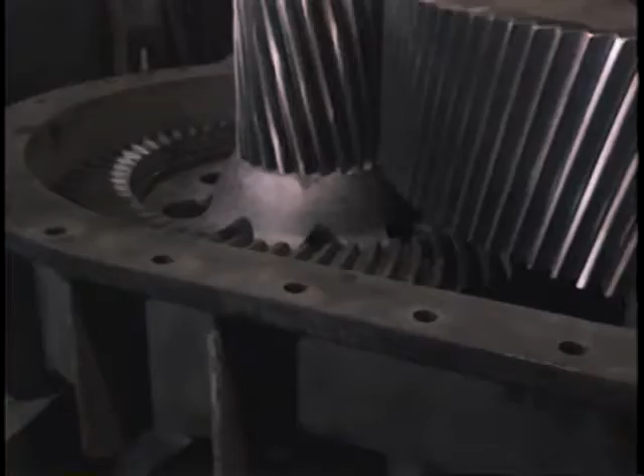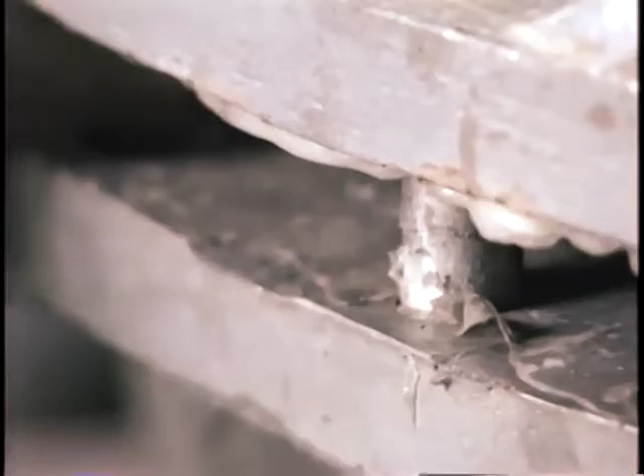When the speed of a motor is different from that required for an application, speed reducers, frequently called gearboxes or gear reducers, are often used to lower the speed. Usually the reducer or gearbox consists of a set of gears enclosed in a sturdy metal housing. The housing keeps the gear set aligned so the gear teeth mesh correctly. Correct alignment increases the life of the gearing and transmits power efficiently.

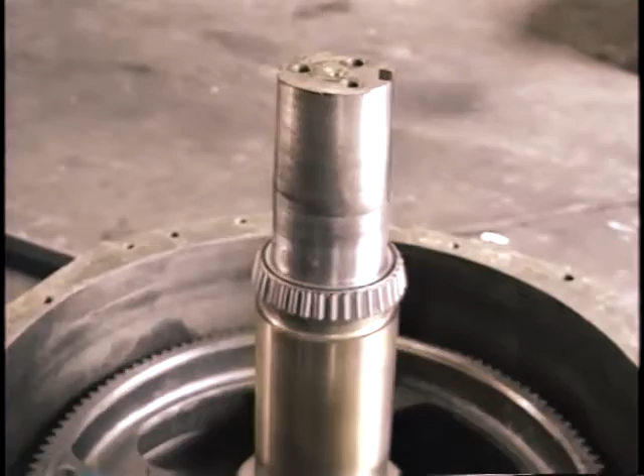The power typically comes from a motor or other driver which is coupled to the input shaft. The speed and power of the motor are transmitted through the gearing to the output shaft, either by complete reduction, in which the reducer is connected directly to the driven machine, like this, or by partial reduction, like this belt drive that further adjusts the speed.

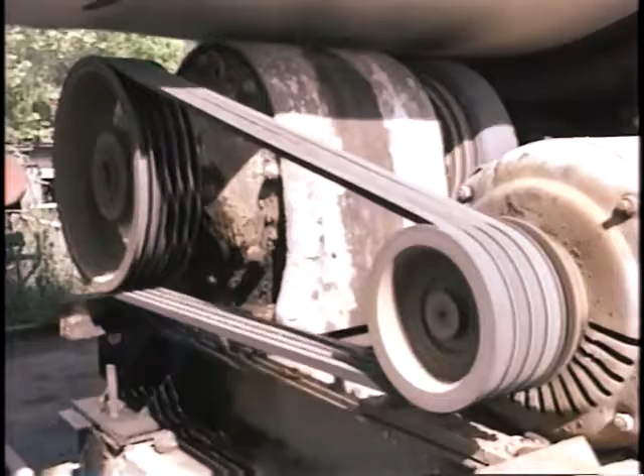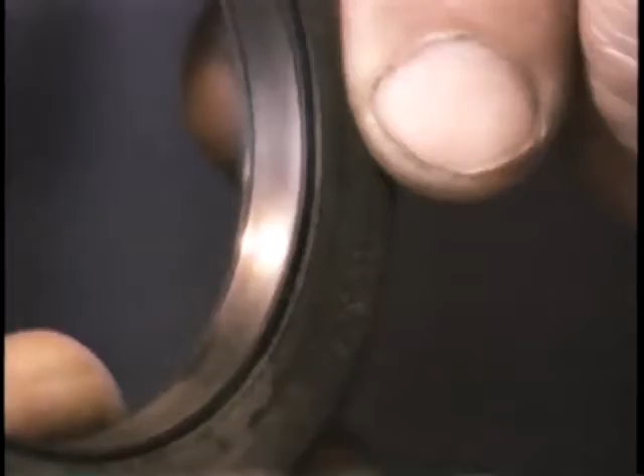Now, most reducers are basically the same, so once you know how to maintain and troubleshoot one, you'll be able to do a pretty good job with all the others you might have to work on. In this program, we'll show you the basic parts of all reducers. We'll show you some of the common things that go wrong with them. We'll show you how to spot problems early, before they become serious. We'll show you how to maximize the efficiency of the reducer and extend its life. And we'll show you what to look for during an overhaul.

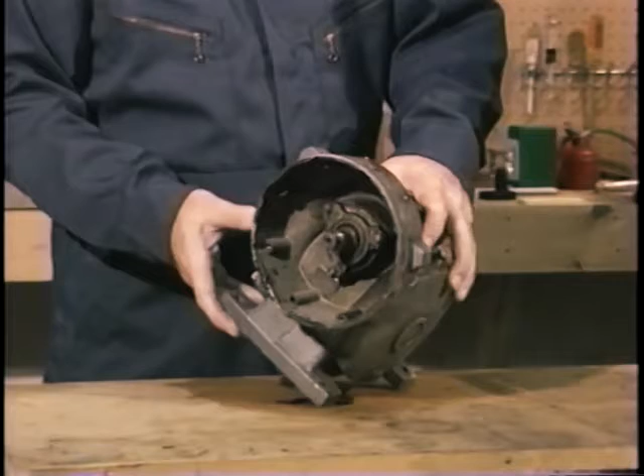Let's start with the basic parts of a common gear reducer. Here's one of the most common types, a worm gear reducer. We already mentioned the input and output shafts. These can really stick out just about anywhere, depending on the design of the reducer, what kind of gears are in it, and the application.

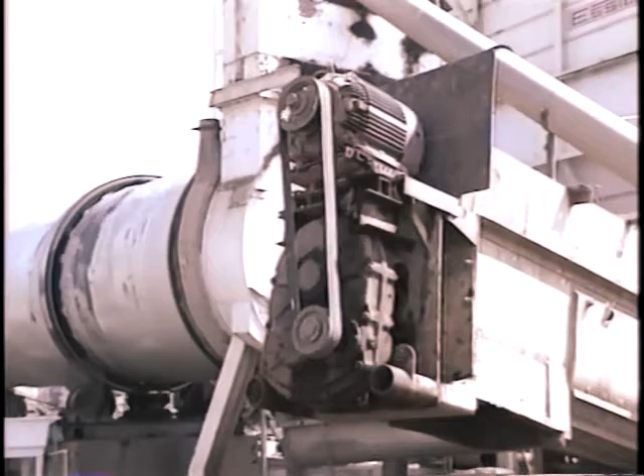In terms of the input and output shaft, there are really just three kinds of reducers. The concentric or inline reducer, in which the input and output shafts are directly in line with each other, like this. The parallel or offset shaft reducer, in which the shafts are mounted at opposite ends of the reducer. And various kinds of angle shaft reducers, like the worm reducer.

However, reducers are also classified by their gear trains: single reduction, double reduction, triple reduction, and so on. In a single reduction unit, a gear on the input shaft drives a gear on the output shaft. In other reducers, the input shaft drives an intermediate gear, which may drive another intermediate gear, or the output shaft. Anything beyond a triple reduction is relatively uncommon.

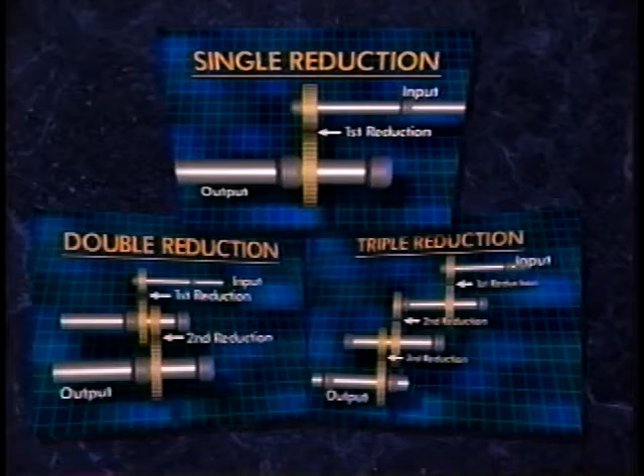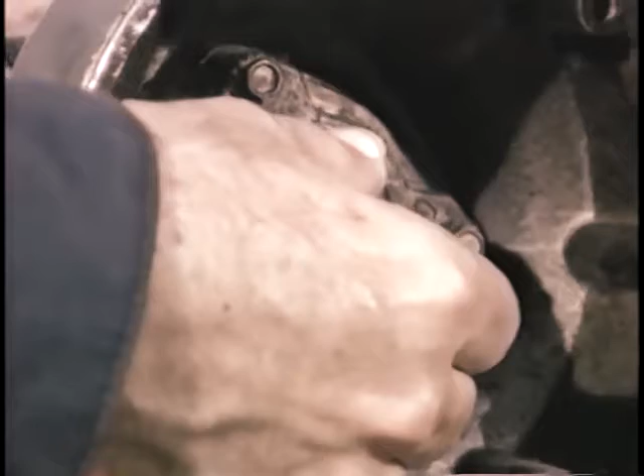Let's get back to the worm reducer. Here, the shaft of the worm is coupled to the shaft of the driver. Typically, this is done with splines on the shaft like this, or with a key and keyway like this, and sometimes with a coupling. When the worm turns, its teeth rotate the gear wheel fastened to the output shaft. Since this wheel is a good deal larger, its shaft rotates more slowly, usually a lot more slowly.

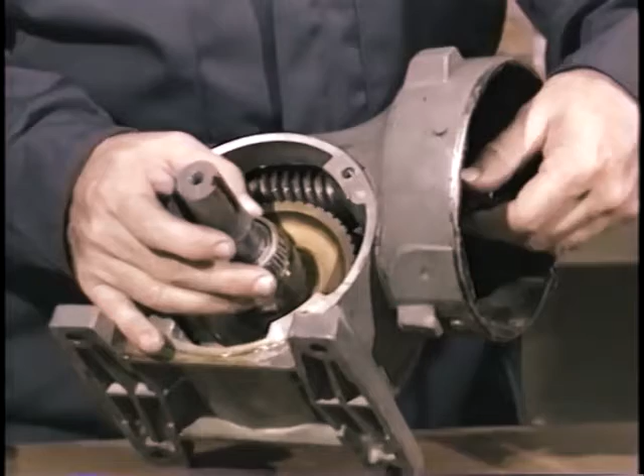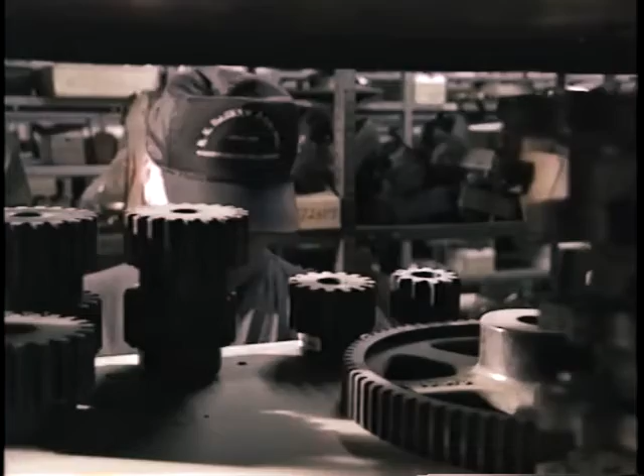Worm reducers are often used when there is a need to greatly reduce shaft speed. Typical input to output speed ratios on a worm reducer are at least 20 to 1 and may go as high as 3,600 to 1 or more. This means that 3,600 turns of the input shaft will turn the output shaft around just once. Of course, different reducers will have different ratios. Many reducers are custom assembled by a manufacturer or distributor from in-stock parts to match the requirements of a particular application. Swapping out the gearing changes both speed and torque at the output shaft.

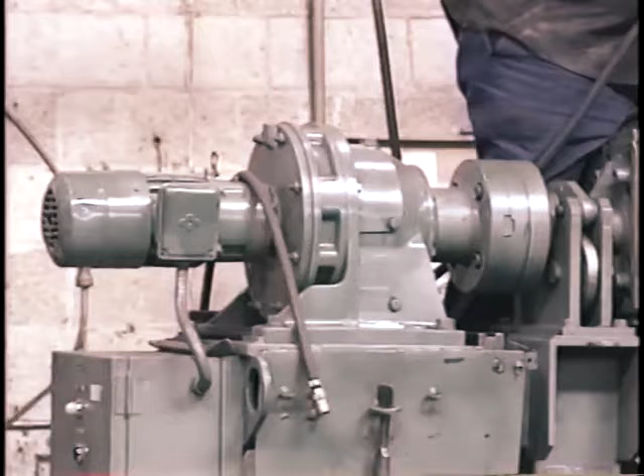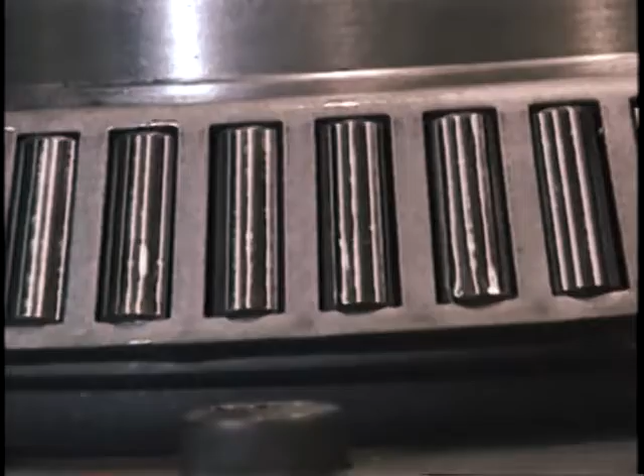Handling the high speeds and torques requires firm shaft support as well as precision shaft alignment. Support is provided by the reducer housing, usually made of cast iron or fabricated steel, and by bearings set into the housing. Input shafts of smaller reducers are sometimes supported by ball bearings, often a bearing at each end of the shaft, but sometimes just a single bearing. Output shafts are usually supported by roller bearings. Almost always there are two bearings, one at either end of the shaft. This provides greater support for the load.

Realignment of shafts within a reducer is normally done only if the reducer has been mechanically damaged, if it has been run hot enough to burn up the lubricant and seals, or if it is being overhauled and the shafts, bearings, and gears are being removed for repair or replacement.

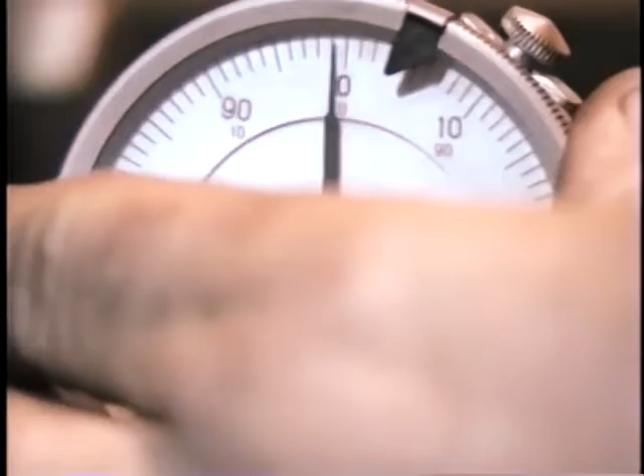However, the alignment of the input shaft with the driver and the alignment of the output shaft with the driven machine is critical. Misalignment will put excess load on the bearings, wearing them out much more quickly. Misalignment will increase the damage caused by shock loading, and misalignment will wear out seals rapidly, allowing lubricant to leak out and contaminants to leak in. But if a reducer is properly sized for its application, if it is correctly aligned, and if shock loading is kept to a minimum, then failure will almost always be the result of lubricant failure.

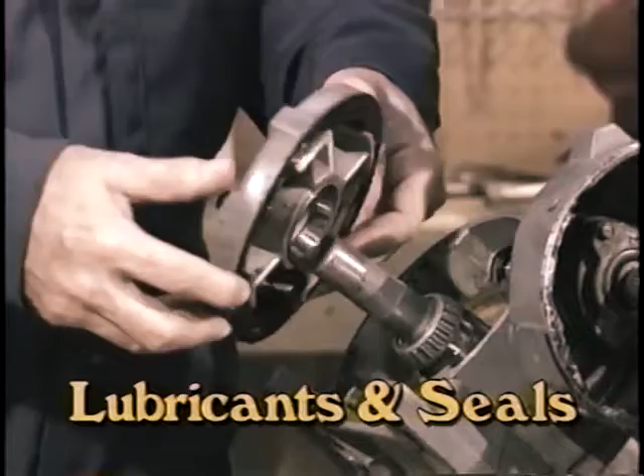The lubricant got too hot, it was contaminated, or a seal leaked and lubricant levels were too low for too long. We'll get to sizing a reducer for its load in a few minutes, but first, let's have a look at lubricants and seals. Wherever a shaft penetrates the casing, a seal will be required.

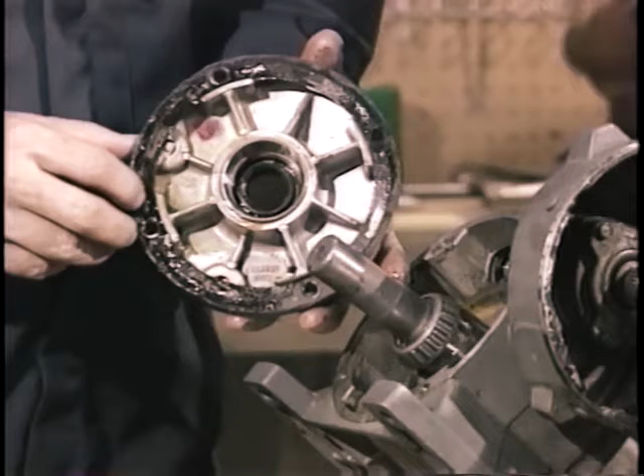The seal has two purposes: to keep the lubricant in and to keep contaminants out. All seals will eventually fail, but seals that are correctly installed and properly maintained will maximize machine efficiency and minimize downtime. The basic type of seal used in most reducers is a dual-lip, full-ring contact seal in a seal case.

The inside lip of a seal usually has a small spring, a garter spring, which keeps the lip in contact with the shaft. The outer lip's resiliency keeps it in contact with the shaft. Some manufacturers also include other assemblies, like this outer seal, which can be filled with grease to block contaminants from getting to the inner seal. The seal is often held in place by a retainer.

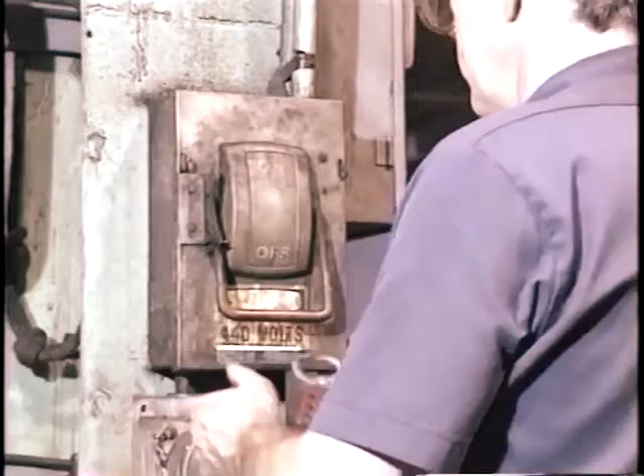Now, sometimes just the seals on a reducer are replaced, and the reducer doesn't have to be opened up. Let's see how that's done. Now, the first step when doing any maintenance on a reducer is to lock it out. Follow the established lockout procedures for the facility in which you work and for the particular piece of equipment you'll work on.

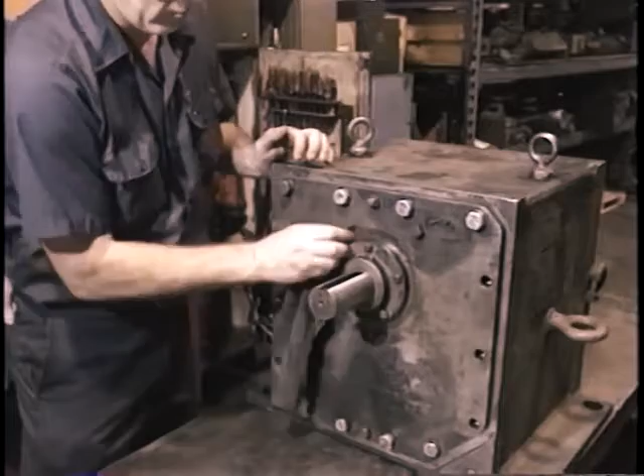After the machine is properly locked out, start by cleaning off the shaft and the outside of the reducer around the seal. This will help keep contaminants out of the reducer when the old seal is removed. Next, remove the seal cage assembly. Most seals have gaskets, and these will have to be replaced with new ones. Check the manufacturer's specifications to make sure you know which ones to use.

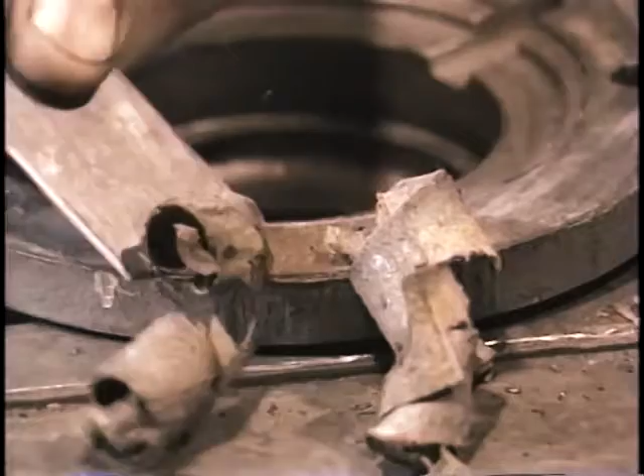They will have to be the same size and shape, and they will have to be of a specific thickness as well. Work carefully. If the seal cage is damaged in the process, it will have to be replaced. Do not attempt to reuse a seal cage that is bent, distorted, or scored, because the seal will probably leak. Clean the seal cage thoroughly and remove any gasketing material.

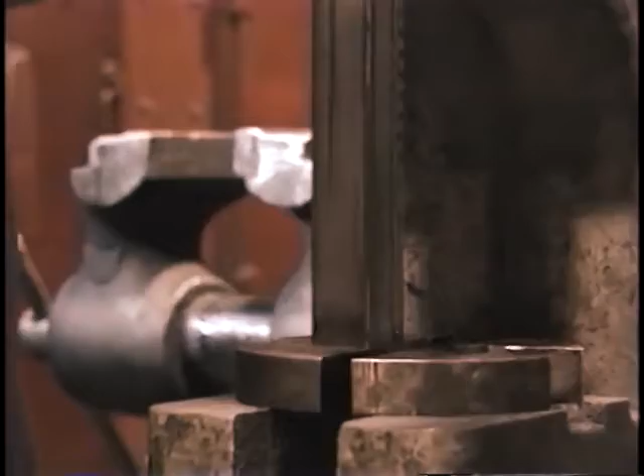Some manufacturers specify a sealing compound for coating the seal prior to installation. Follow the manufacturer's instructions, then place the seal squarely in the seal cage with the garter spring on the side of the cage that will be toward the bearing.

Press or tap the seal into place by using a cylindrical tool that applies pressure evenly around the circumference of the seal case. Pressing or tapping directly on any small portion of the seal case will distort it, damaging the seal and almost certainly causing a leak once it is reinstalled.

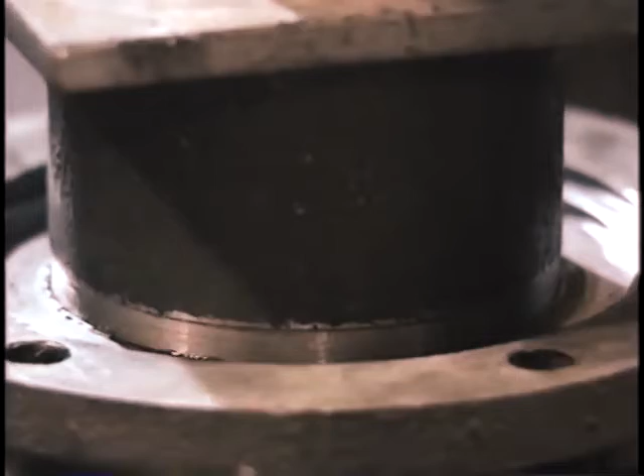Before installing the seal cage and seal, be sure to clean off the shaft and clean off the face of the reducer. When cleaning the shaft, do not scrape or use abrasive materials on the part of the shaft that has been polished by the seal. This polished section will be bounded on either side by seal paths or wear tracks.

They should be very narrow, generally no more than 2/100ths of an inch, and barely felt when passing a fingernail over them. Paths that are significantly wider or deeper indicate shaft misalignment, cocked seals, or a shaft that does not run true. Failure to correct any of these conditions and failure to repair the shaft will probably result in leaks when the new seal is installed.

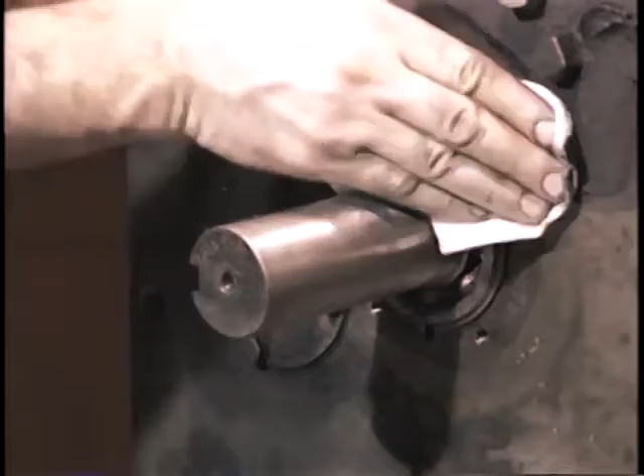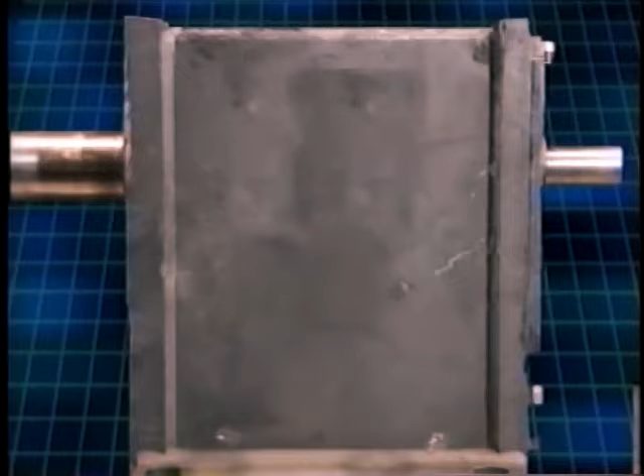When cleaning off the face of the reducer, be sure to scrape off any old gasketing and clean the surface thoroughly. The condition of the surface and the thickness of any gaskets or any shims may be critical to the proper operation of the reducer. In some cases, especially when replacing seals at the output shaft, you may have to measure and set the axial float on the shaft as well as set the preload on the bearings.

Axial float is a measure of how much the shaft will move back and forth. Typically, this is just a few thousandths of an inch. Depending on the manufacturer, it may have to be set to within a thousandth of an inch or less. A dial indicator is normally required to measure axial float accurately. Be sure to follow the procedures and specifications set forth by the manufacturer.

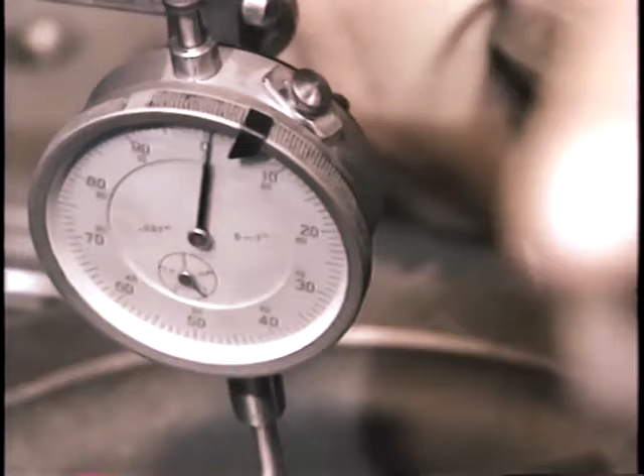Preload refers to the load placed on the bearings before any running load is added. Usually, preload is set indirectly by measuring the axial float, then varying the thickness of the gaskets and shims. Again, preloads are often set to within a thousandth of an inch or less, so a dial indicator and a copy of the manufacturer's service manual are normally required.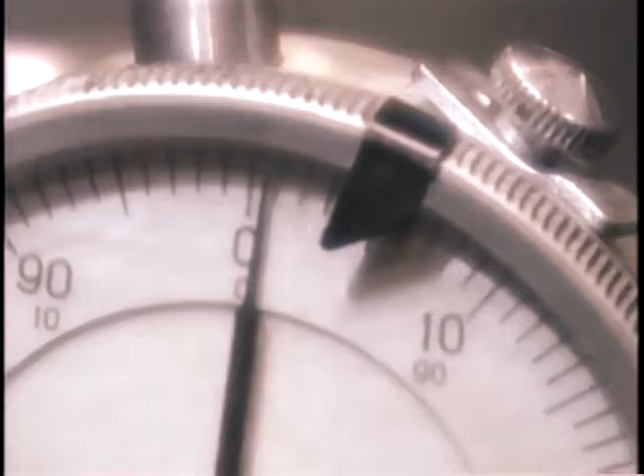When installing gaskets, always use new ones. In many cases, the gaskets also serve as shims, shim gaskets as they are called.

They are designed to compress a specific amount when installed. Because used gaskets or shim gaskets have already been compressed, they may not provide the correct axial float, the correct preloading, or the correct alignment.

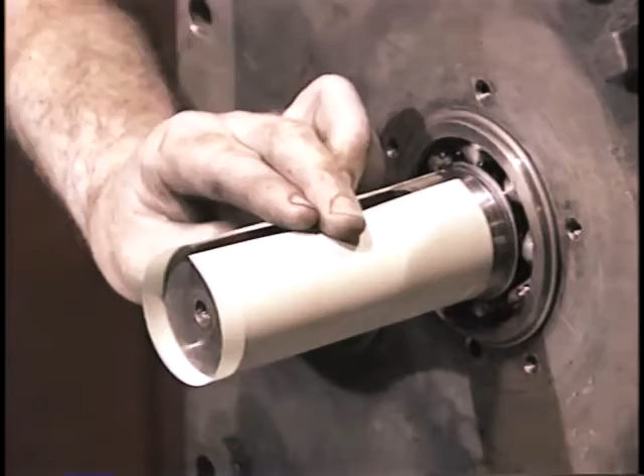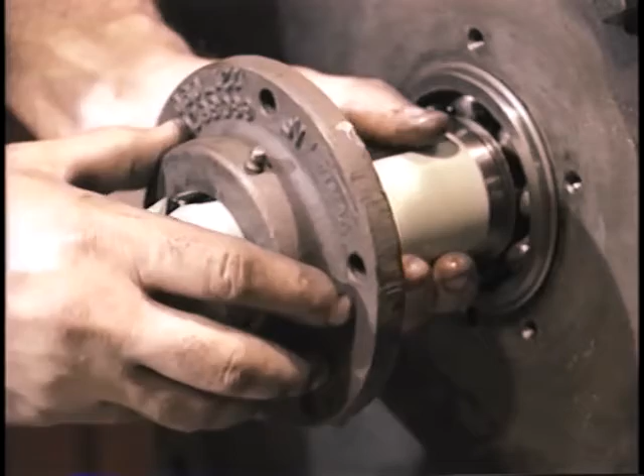With the required gasketing and shims in place, the new seal can be installed. Damage to new seals occurs most often as they are being slid over the shaft. To help prevent this, cover the shaft with thin, tough paper or plastic, then lubricate both the covering and the seal. When sliding the seal into place, be careful not to cut the seal or expand it.

Do not unseat or damage the garter spring, and do not distort the seal case. Any of these can result in a seal that leaks either at startup or soon afterward. In many cases, the seal case must be centered on the shaft, but be sure to consult the manufacturer's instructions because there may be registration marks that need to be lined up.

As we said before, the seal keeps lubricant in the reducer, but we also said that every seal eventually fails, so every reducer eventually leaks. As that happens, lubricant levels gradually drop, and the remaining lubricant heats up and can oxidize very quickly. When this happens, bearings begin grinding and can break down quickly. And seals can become as brittle as glass within minutes if temperatures are high enough.

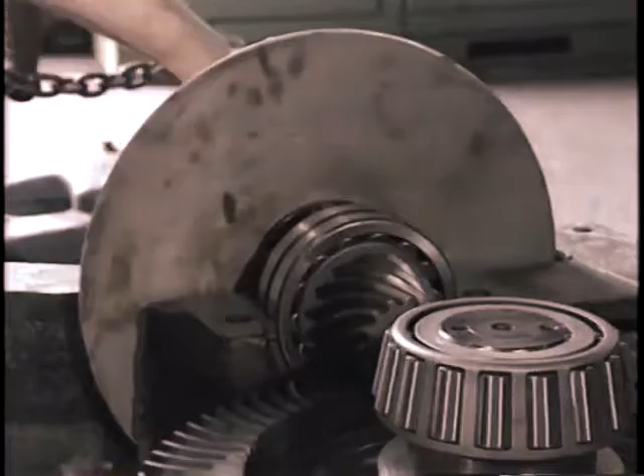Many reducers have a sump from which the lubricant circulates through the reducer. Sometimes this is done by the action of the gearing, as in this small worm reducer. But other reducers may have splash oilers, oil slingers, or other oil distribution systems. These may include pressurized oil delivery systems that pump the lubricant where it is needed.

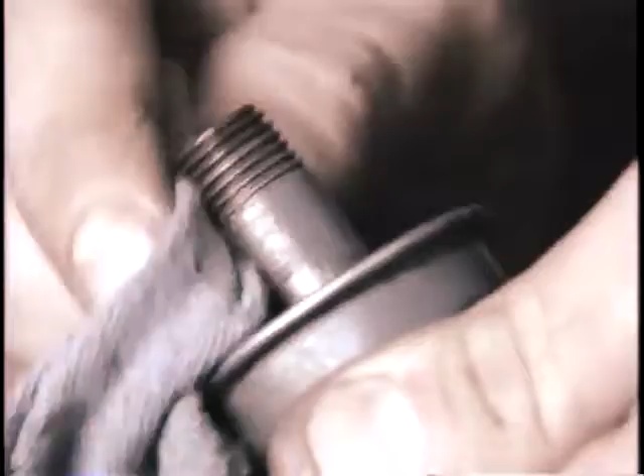Oil pumps are often used when input or output shafts are oriented vertically. Many larger reducers include oil filters, and most have air breathers to equalize pressure and help assure oil flow. Adequate lubrication is so important that most facilities have a routine program for checking lubricant levels.

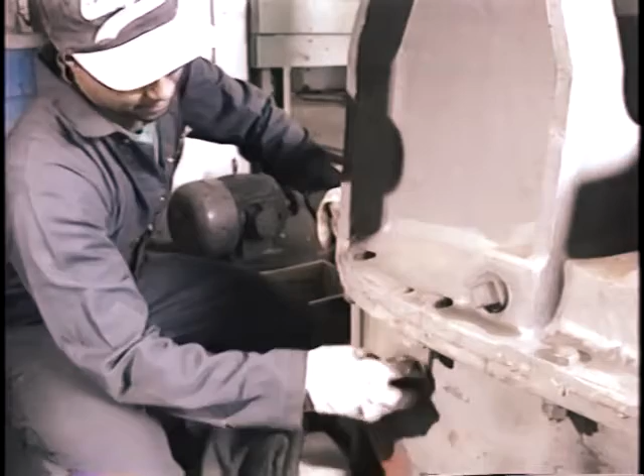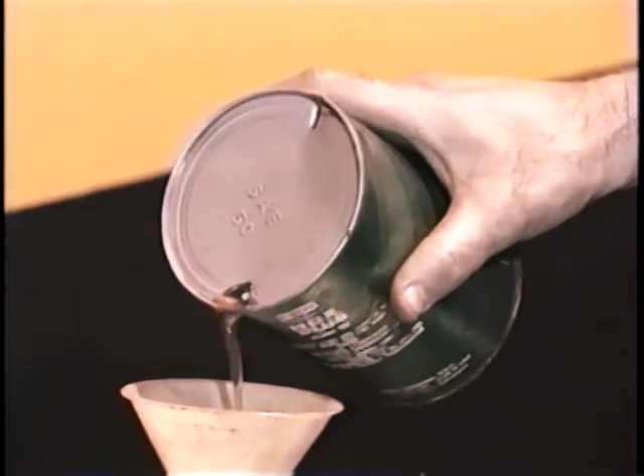Many larger reducers have automotive-type dipsticks, while others have sight gauges or other oil level indicators. Smaller reducers may have an access plate or plug to check lubricant levels. If lubricant has become contaminated by dirt, grit, grime, or water, it will quickly destroy bearings and gears. The source of the contaminant should be identified and eliminated, and the lubricant should be changed. All air breathers should be checked and kept clean.

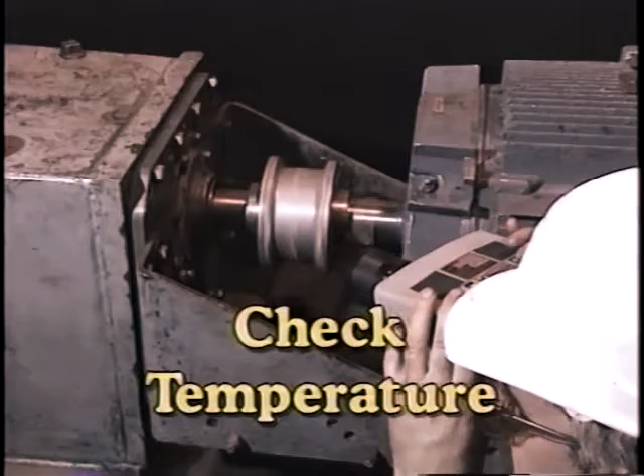Reducers that run too hot will break down more often because high temperatures degrade both the seals and the lubricant itself. Most lubricants used in reducers oxidize very rapidly above 200 degrees. Speaking roughly, seal life is halved for every 25-degree rise in temperature above 200 degrees and doubled for every 25-degree temperature drop below 200 degrees.

To extend the life of the lubricant and the seals, some reducers include a fan to help move cooler air across the radiant surface of the reducer housing. Usually, the more efficiently the reducer converts input power into output power, the less likely it is to have a fan. Many reducers have fins to help remove heat.

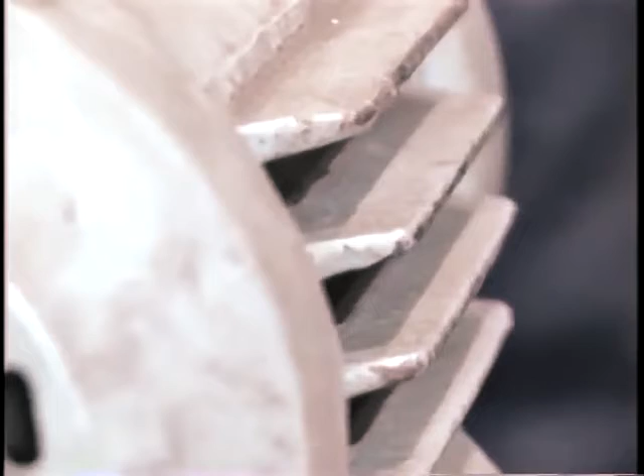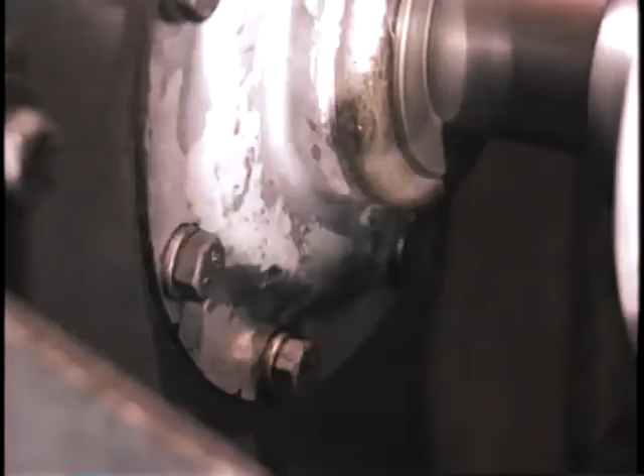Finally, be sure to check for leaks. All seals leak a little, sometimes as much as a drop or two a day, even when new. In general, a seal that leaks as much as half a dozen drops per hour should be replaced. Leaking oil not only creates a housekeeping problem, but it can be a fire hazard as well.

Okay, now we've seen the major components that all reducers have in common. We've looked at the input and output shafts, at the bearings, at how to replace a seal, and we've seen the importance of lubrication and simple maintenance routines in making sure a reducer operates reliably and efficiently.

Now let's look at some non-routine maintenance, an overhaul. And while we're at it, we'll look at the main components of every reducer, the gearing. As we said before, the speed and power of the motor are transmitted through the gearing to the output shaft. The type of gearing in the reducer has a lot to do with how much power is transmitted.

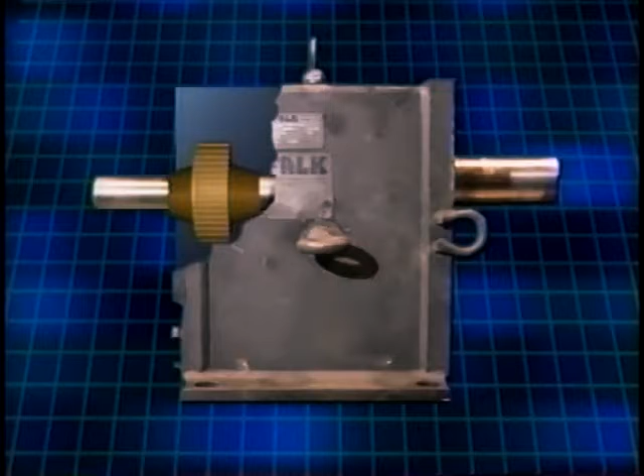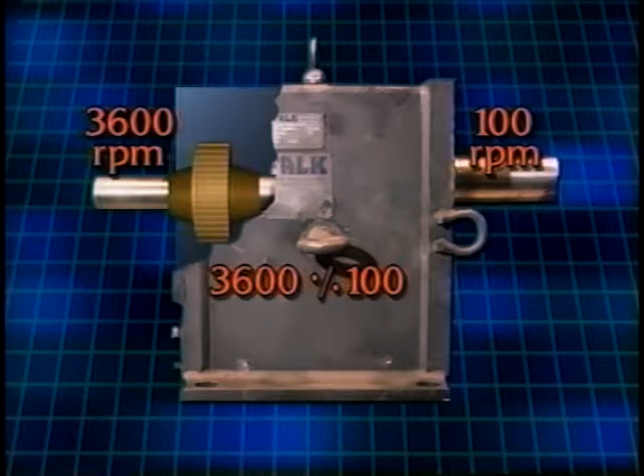In all cases, of course, the reducer and its gearing must be matched to the application if long, reliable service is expected. Reducers are selected for an application based first on the gear ratio. The speed of the driver is compared to the desired speed of the output shaft to determine the gear ratio required. For example, if the input speed of the driver is 3,600 RPM and the desired output is 100 RPM, then the gear ratio is 3,600 divided by 100, or 36 to 1.

In practice, manufacturers generally make standard ratios like 5 to 1, 15 to 1, 40 to 1, and so on, so the output speeds for any prime mover driving through a reducer are often decimal numbers, like 58.33 RPM for a 30 to 1 reducer operated by a 1,750 RPM driver.

After the correct ratio is chosen, reducers are generally sized by two factors. The first is a mechanical rating, usually expressed as the power a unit can transmit. In addition, it will have a thermal rating, which specifies the power a reducer can transmit without exceeding the manufacturer's recommended temperature rise. Thermal rating should always be considered carefully because, as we have seen, long-term reliable operation depends on heat and the effect of heat on seals and on lubricants.

Most reducers also have three other important ratings. One rating is a service factor. The service factor is easier to understand if you think of it as applying to the application rather than to the reducer. In fact, to get the service factor, you'll refer to a list of applications, like this one published by AGMA, the American Gear Manufacturers Association, and in common use by most manufacturers. The charts are based on three factors: the type of load, the duty cycle, and the type of prime mover.

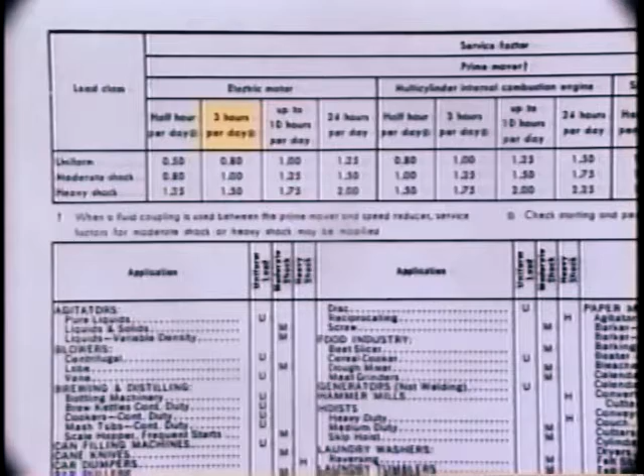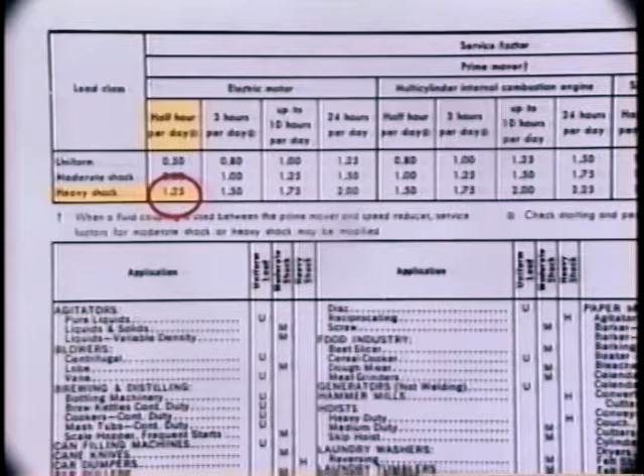For example, a hammer mill is in a heavy shock load class, and when operated 24 hours per day by an electric motor, it would have a service factor of 2.0. Operation for up to 10 hours per day would reduce the service factor to 1.75. Operation for 3 hours per day would reduce the service factor to 1.5. And operation for only a half hour per day could reduce the service factor to 1.25. Operation of the hammer mill by a multi-cylinder internal combustion engine, however, would change each of these service factors.

The service factor is used to select an appropriate reducer. For example, if an application has 20 horsepower load with a service factor of 1.5, the reducer selected must be capable of delivering 30 horsepower without exceeding its thermal rating. Another rating is the overload capacity. Typically, this will be 200% of the power rating. This means, for example, that the reducer can handle a temporary overload twice as large as its rating. The overload, however, must be applied only intermittently. Usually, this means no more than a few times during any 10 hours of operation.

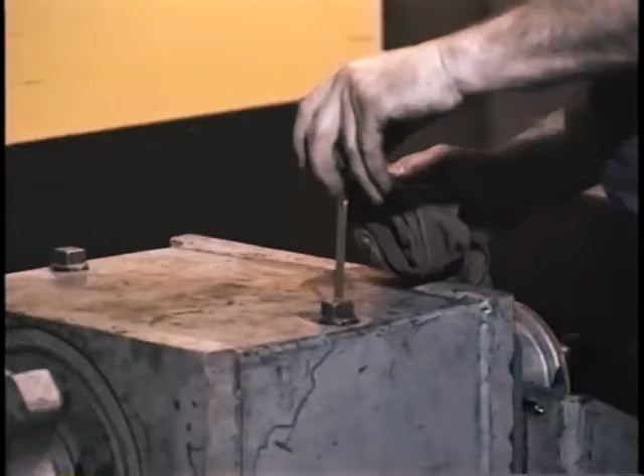The third rating is the maximum overhung load. This refers to how much weight the input and output shafts must carry as a result of the driver and the driven load. Exceeding the maximum overhung capacity will damage the reducer. Usually, it's not difficult to spot a misapplied reducer. It'll run hot. Its lubricant will require frequent replenishment and frequent changing. Seals and bearings will wear out quickly. And the gear teeth will probably be damaged.

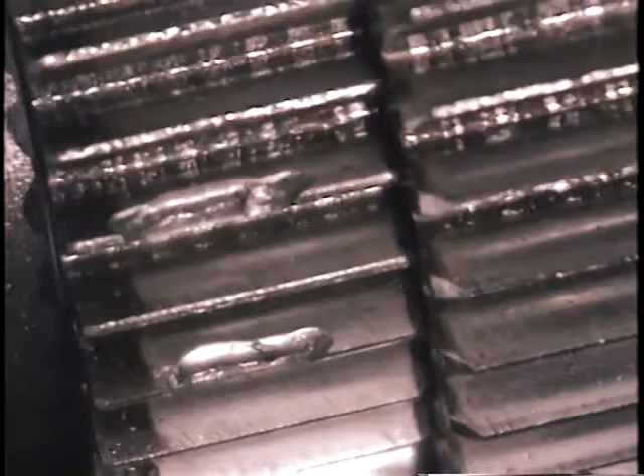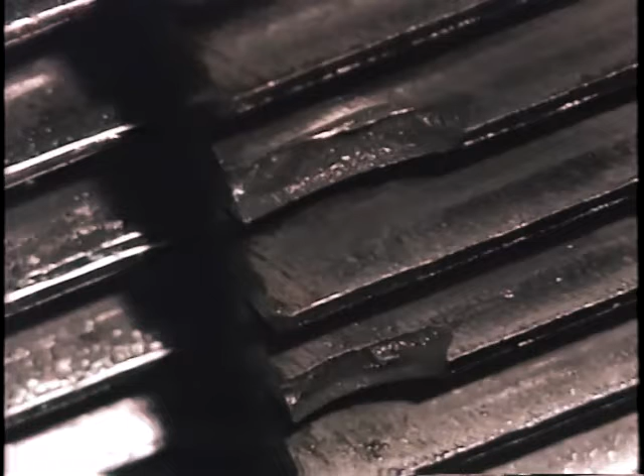A close examination of the gear teeth can tell you a lot. The most common problems are pitting of the tooth surface and fatigue cracks at the root of the gear teeth. Gears are rated based on how badly they pit and how easily they crack. If the reducer is not being opened up for an overhaul, castings or prints of the teeth can sometimes be made. An analysis of these prints can often pinpoint operating problems long before they become serious. Of course, if you're overhauling a reducer, you'll be able to take a good close look at all the gears.

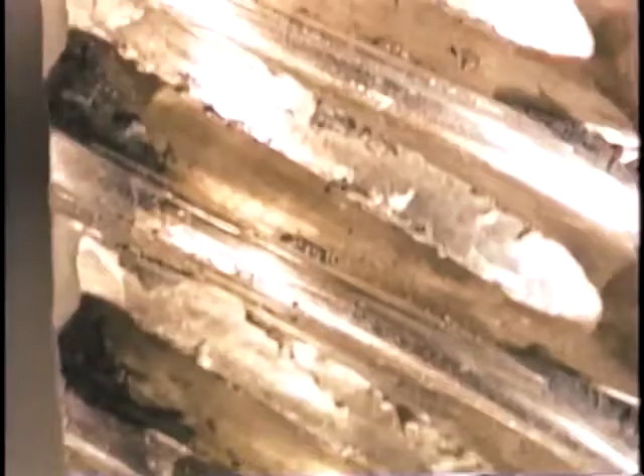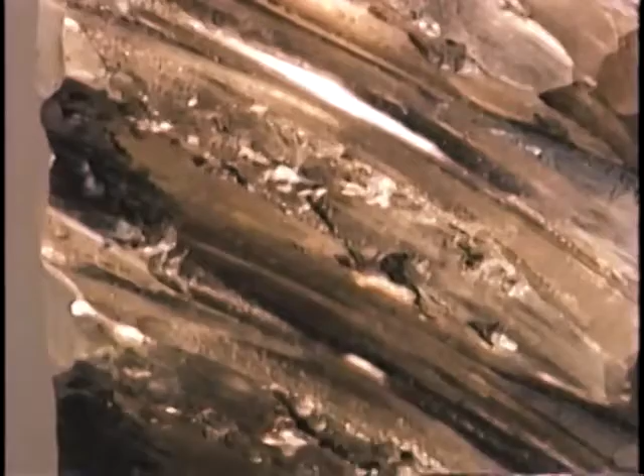Some types of wear obviously mean trouble. These teeth were badly bent, and some even stripped off. The gearbox was seriously overloaded, far in excess of its rating. However, problems like this are usually preceded by signs of failure. When gearing is greatly overloaded, or when it is repeatedly overloaded to a lesser extent, it will often develop cracks at the base of the teeth. In general, you can expect that the life of a gear will be reduced by a factor of 8 if the full load is doubled. This means gearing that might have run reliably for 25,000 hours may break down in about 3,000 hours.

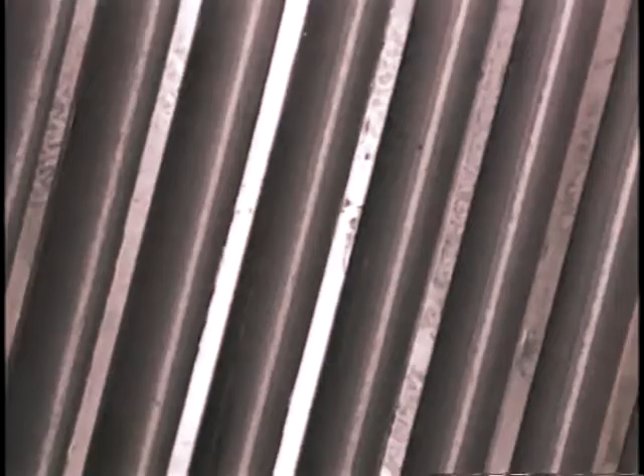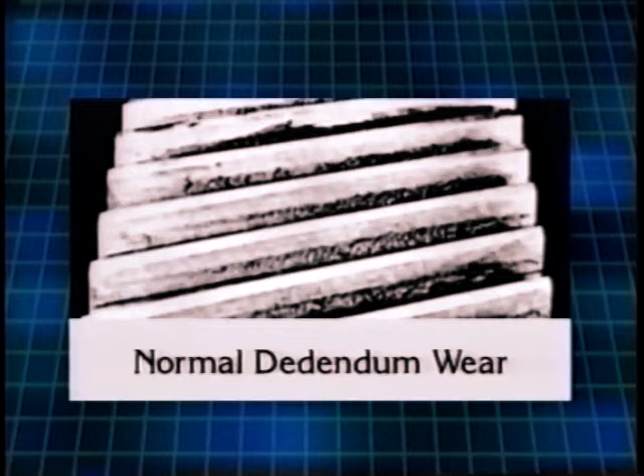Now, not all obvious wear is bad. There is a kind of normal wear that occurs when gears are operated at or near full load. The pattern of wear appears in the dedendum, below the midpoint of the tooth. It's called pitting, and it looks like a lot of small pits or holes in the surface of the tooth. If the pits remain shallow, and if they are all in the dedendum, and if the edges of the pits gradually wear down, then this kind of wear is considered normal.

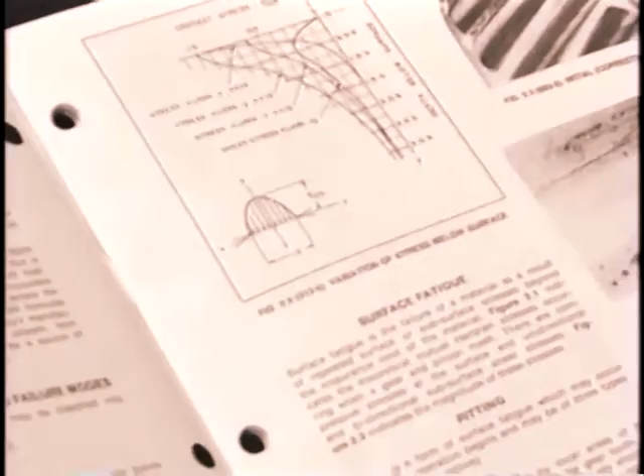However, if the pits get deeper, or if the pitting extends beyond the dedendum, or if the edges of the pits do not wear down, then destructive pitting is occurring. The gear is on its way to failure, usually fairly quickly. Many other kinds of wear can occur, and all of them can tell you a lot about what's going on in the reducer. When overhauling a reducer, it is often worthwhile to compare gearing with descriptions of known kinds of wear to determine what may be going wrong.

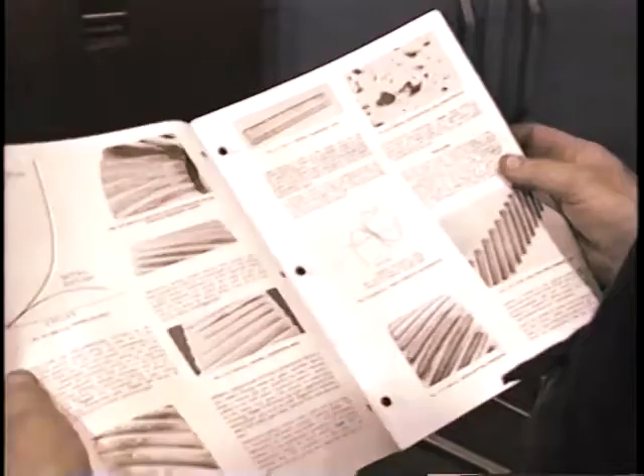Standard descriptions and photographs of common wear patterns are available from many manufacturers and from AGMA. Now, before you start removing a reducer for an overhaul, there's always one thing to do first: lock it out. As we said before, follow the established lockout procedures for the facility in which you work and for the particular piece of equipment you'll work on.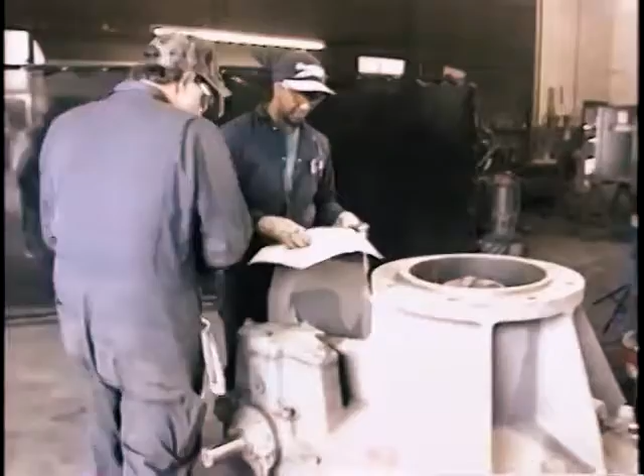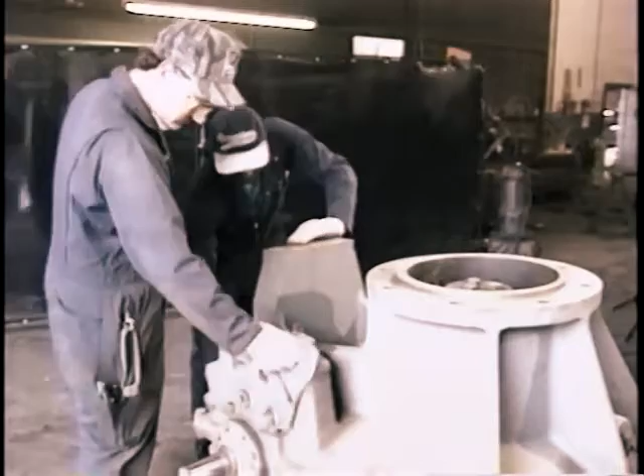The next thing to do is make sure you keep the manufacturer's service manual handy. Do not attempt to overhaul a reducer without it. Very often, specific sequences must be followed during disassembly and during reassembly in order to prevent component damage and to assure correct operation. Start by cleaning off the reducer as best you can. The cleaner it is before you break loose any bolts, the less chance there will be to get dirt and grime in the housing, on the gearing, and in the bearings.

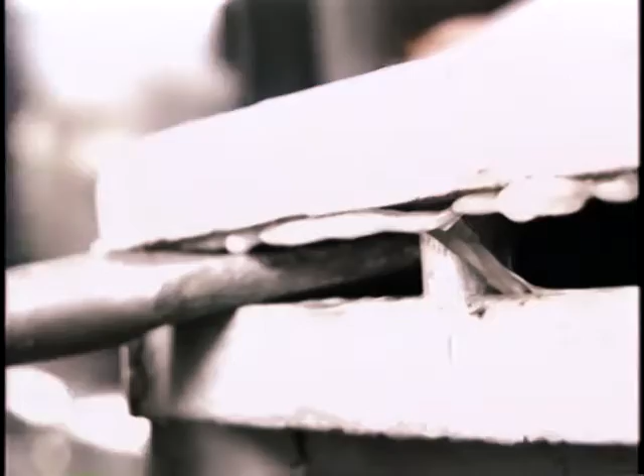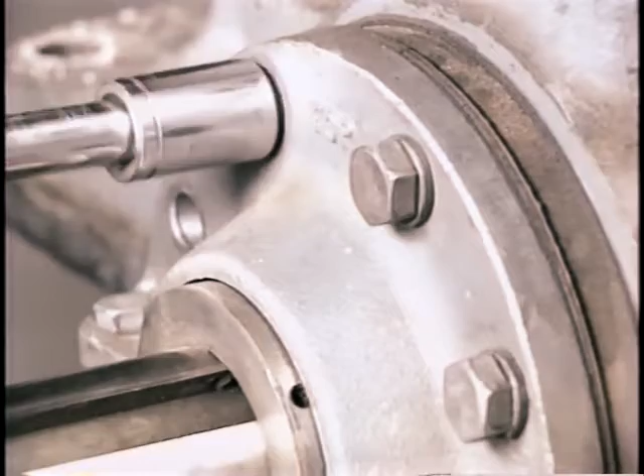On small reducers, you'll want to drain the oil first before disassembling the housing. On larger reducers, the cover can usually be removed first. Be sure to consult the manufacturer's service manual for the proper procedures about how this is done. For example, some reducers have dowels that must be removed, while others do not. Some bolts should never be removed, or only loosened, while others must be removed entirely. On some reducers, bolts below the housing split should be loosened but left in place. It's good practice to wire shims and shim gaskets in place to keep track of them for later replacement.

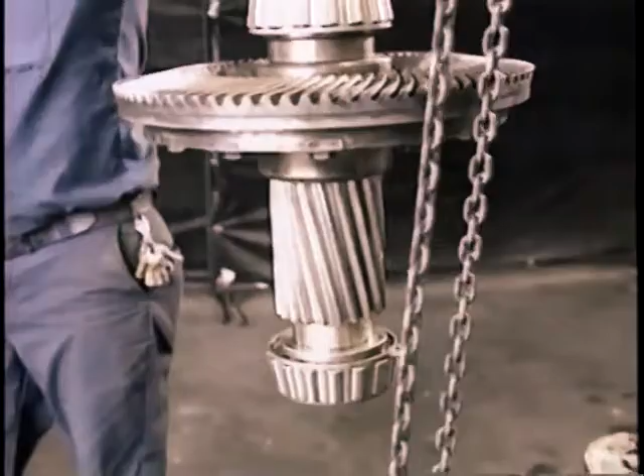In most reducers, the gearing and shafts must be removed in a specific order. The high-speed input shaft and gearing, then the intermediate gears, if it is a multiple reduction unit, then the low-speed output shaft and gearing. It is critical to hoist the gearing straight up. Gear teeth are easily damaged if they bump against each other. Normally, you'll replace all the seals, and you'll replace all the bearings for the shafts that have been removed. Use the correct tools when working with bearings: a bearing puller to remove them, a controlled heat source to expand the new replacements.

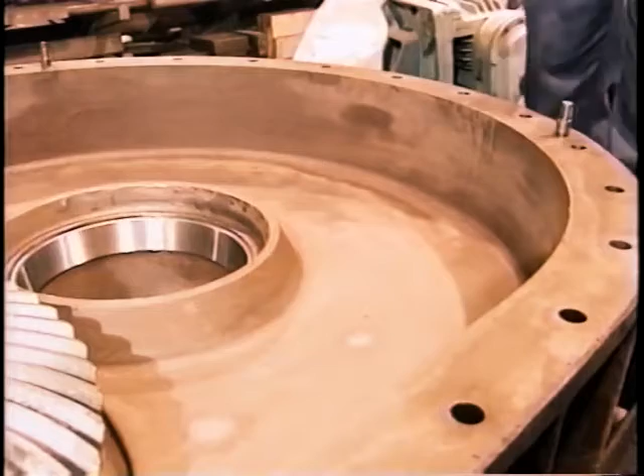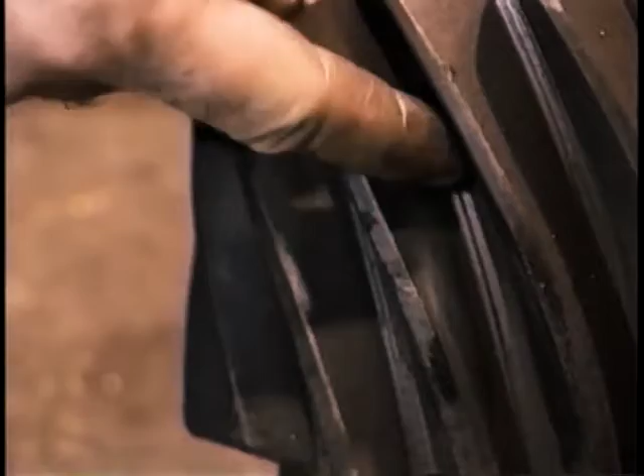Clean the air breather, and clean or replace the filter if there is one. Clean the inside of the housing thoroughly, and clean the oil pans, troughs, and any other lubricant distribution systems. Use approved solvents. Carefully examine the shafts and gearing for signs of damage. Damage to the gear teeth other than normal pitting usually calls for replacement of the gear. In some cases, this will mean replacement of the shaft as well, because some gears, especially small pinion gears on a high-speed shaft, cannot be removed without destroying them.

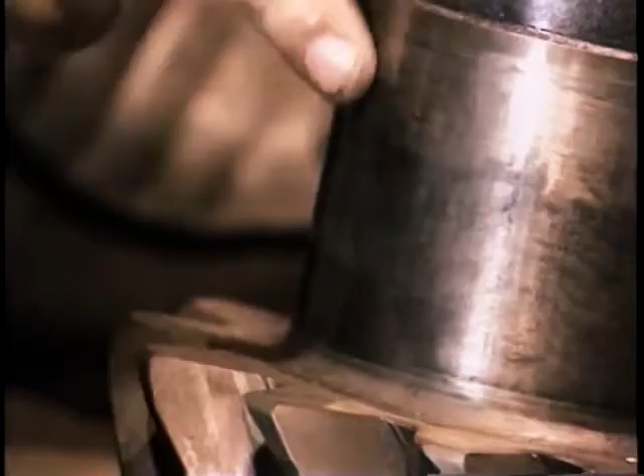Check the shafts, especially for seal wear paths that are too wide or too deep. This is a common cause of leaking seals. Shafts with pronounced wear paths should be resurfaced or replaced. Sometimes, shafts can be adjusted during reinstallation so that the seal rides on a new section of the shaft. When reassembling a reducer's gearings, shafts, and the housing, be sure to follow the manufacturer's specifications for correct tightening. Failure to achieve the proper torque for lock nuts and cover bolts, or to follow other instructions for tightening, could result in serious damage to the reducer during operation. Use a properly calibrated torque wrench and an impact wrench if required.

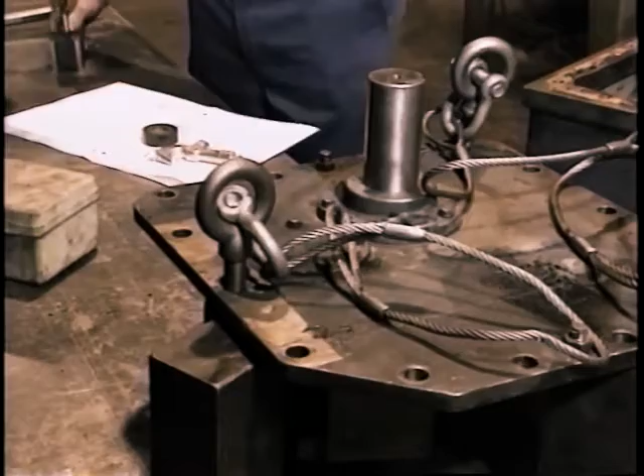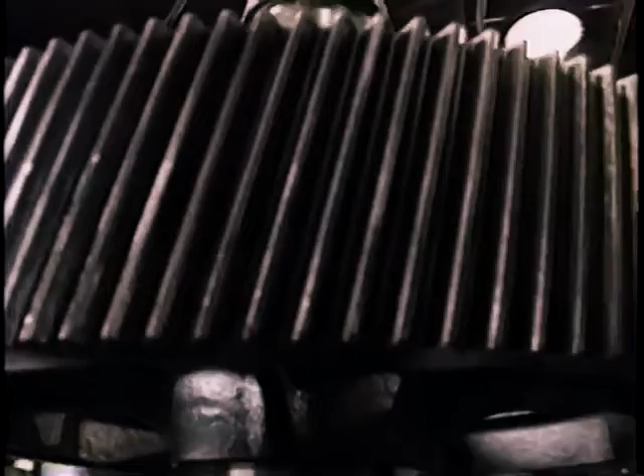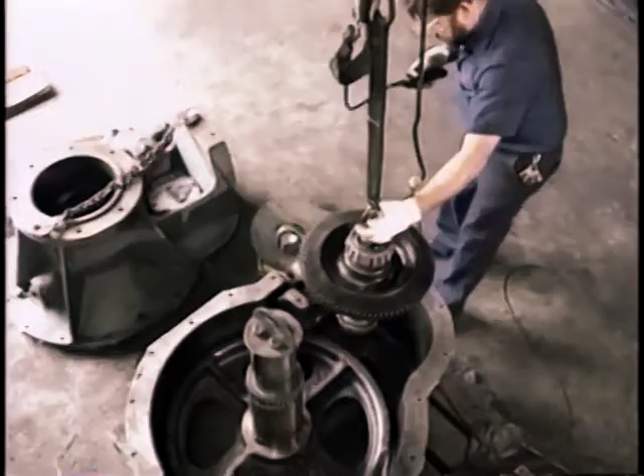During reassembly, be sure to read and follow the manufacturer's instructions carefully. Often the axial float of bearings will have to be set, typically to within a couple thousandths of an inch. All shim gaskets and gaskets should be replaced. Reassembly should be done in the reverse order. Generally, the low-speed output gearing and shaft, followed by any intermediate gearing, and finally, the high-speed input gearing and shaft. Do not bump the gears together. Again, refer to the manufacturer's service manual. If shafts are being reversed or replaced or offset, you may have to switch oil pans and troughs around, or you may have to rewire the motor.

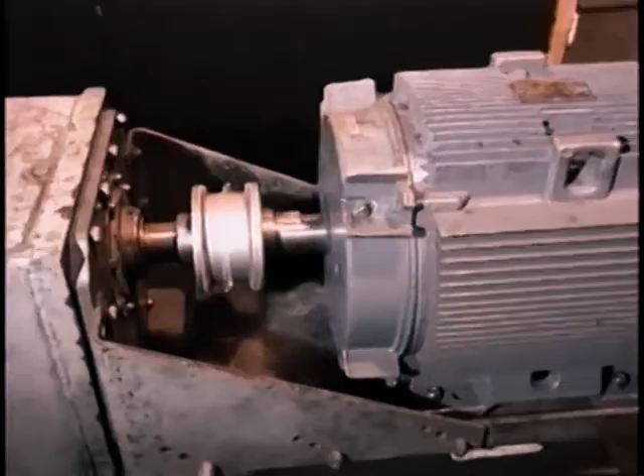Finally, add the cover gasket if there is one, or coat the top of the base split with a sealant. Then lower the cover into place and tighten all bolts to the specified torque. Recheck the axial float of each shaft. Turn the gear train by hand. Then add lubricant to specifications. Overhauled reducers should run without a load for an extended period of time, while temperature and oil levels are checked periodically.

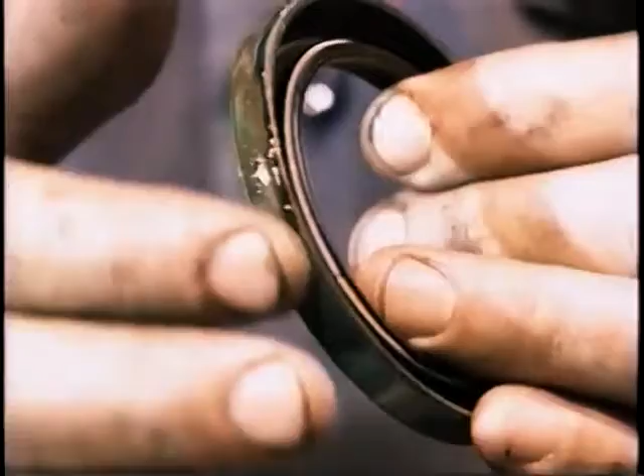In this program, we've shown you the basic parts that all reducers have in common: shafts and seals, bearings and gears. We've shown you some of the common things that go wrong with reducers and how to spot them early. If you follow the basic maintenance guidelines in this program, you'll be able to maximize the efficiency of the reducers you work with. You'll be able to get them back up and running again quickly when things do go wrong, and you'll be able to keep them working reliably for a long time.